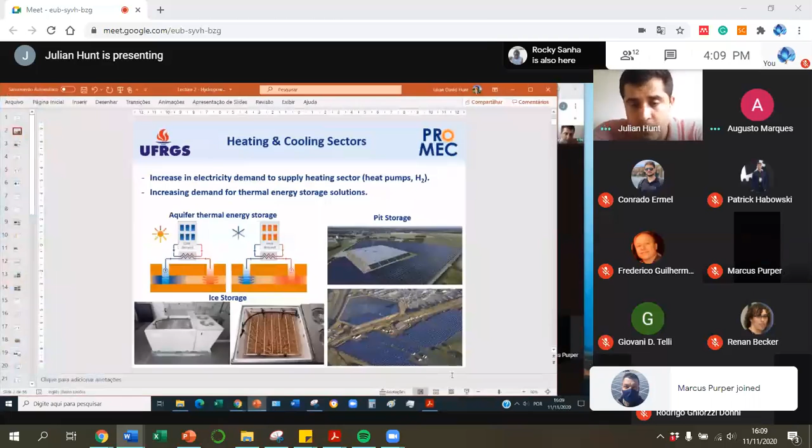There is also ice storage. Ice storage is used in Japan for a reasonable amount of time today. There are more new technologies being developed. This is one example: you have a tank and you use ice. The problem with ice is that it has a very high heat insulation capacity, so in order to freeze the whole tank with ice, you need coils, you need fine solutions, and this is one of the solutions for ice storage.

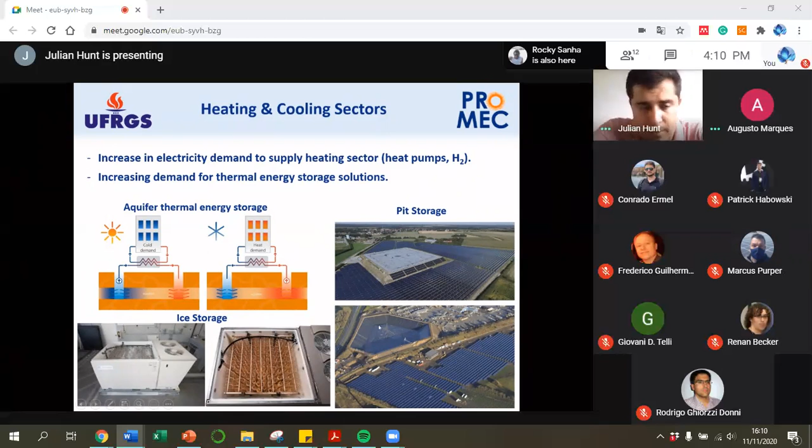Another one, which is also mature and used nowadays, particularly in Denmark, it's a very Denmark technology, is basically to dig a hole, a pit. You insulate the pit thermally so it doesn't leak water, and then you fill up this pit with water.

In the summer, when the temperature is warmer outside, they run the water through heat exchangers and heat up the water. But then in the winter, when the temperature reduces significantly, the water here is warm, and then they use it to increase the efficiency of district heating plants.

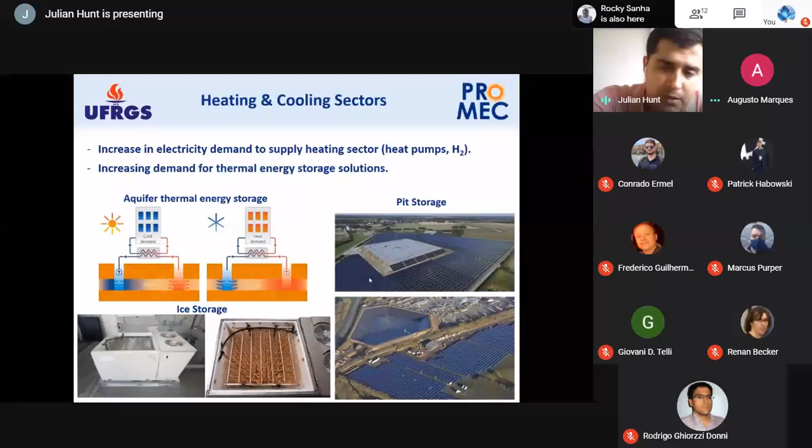These are probably not going to be a viable solution in Brazil because first, we don't have district heating. Second, the temperature variations are not so high. You need very hot summers and very cold winters in order for it to be a viable solution.

And continuing this introduction to energy storage, we have different alternatives for energy storage.

One alternative is to diversify the sources of energy. For example, when you have a very hot day and it's very sunny and not raining, you reduce the amount of hydropower during that day.

Usually when it's very hot, the wind is lower, so you generate a lot of solar power. When it's raining, when you have a month that rains a lot, you generate more hydropower. And when it's not windy, you can use other solutions.

For example, some biomass that's stored, or geothermal, or even coal, nuclear, natural gas with carbon capture storage, and nuclear power.

So the idea is to diversify as much as possible in order to reduce your reliance on energy storage.

So this is a prediction for the US, one of the predictions for US electricity generation until 2050, produced by the National Renewable Energy Laboratory.

And another aspect for estimating how much storage you need for your grid, for your energy solution, is that it will vary with the amount of intermittent variable energy sources.

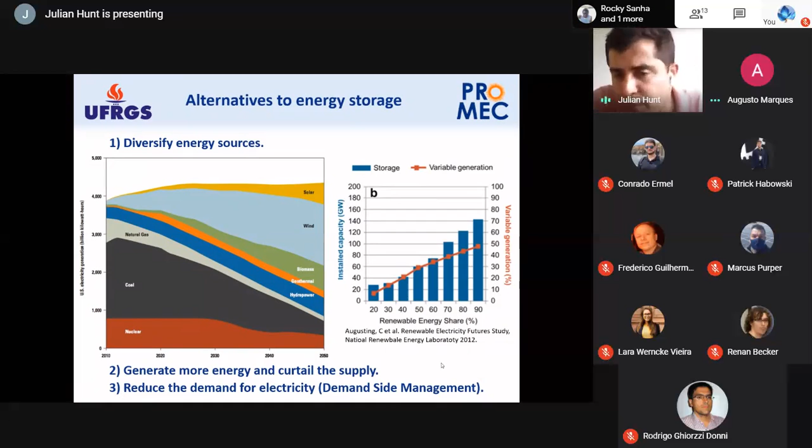And this commodity, for example electricity, has to go into a charger to charge the storage container. And then in order to take out the energy, you need a discharger.

So it's not only that you pay for the storage container. You need to transform this energy, this electricity, this commodity into another type of commodity to be able to store it and then discharge it.

The only solution where you don't have to do this is ultracapacitors, where the storage container itself is the energy storage facility. But with ultracapacitors, you still need to

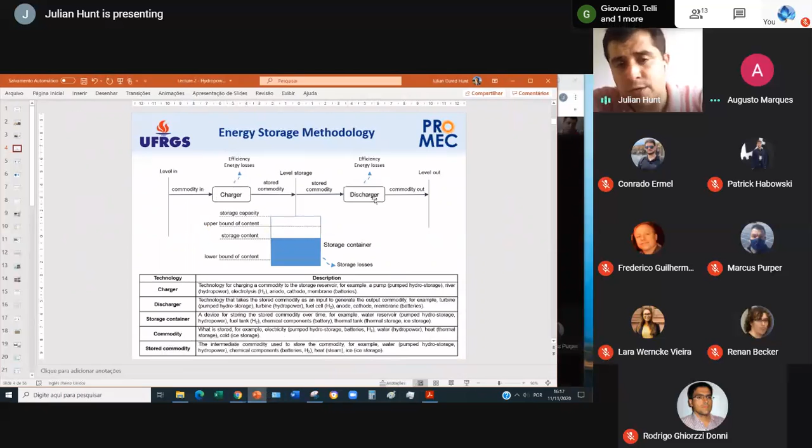Flavio. Hello, Flavio.

So this charger, the unit is in gigawatts or megawatts, is the capacity, the amount of energy that you can add to the storage in a certain time. So if you put a lot of money into this, you can increase the storage very quickly.

If you add a lot of money into the discharger, you can discharge the stored energy very quickly. And then you can invest a lot of money in the storage container, which will increase the amount of time that you can store energy, the amount of energy that you can store.

So in most cases you have to invest in the charger, the discharger, and the energy container. So it's three different aspects. Sometimes the charger is the same as the discharger, the same technology. Sometimes it's not.

Sometimes the charger and discharger come as a unit, everything together, depending on the technology. For example, in a hydropower plant, the charger is the pump, or the river feeding a hydropower reservoir. The river itself is the charger, you don't pay for it, but it's a limited resource, and you can only use it in certain locations viable for building a hydropower plant.

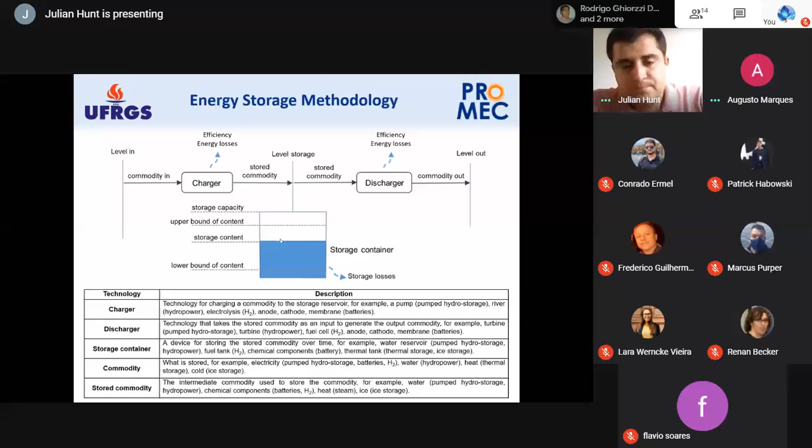And that's it for different energy storage technologies and their applications. I talked a bit about the need for storage, but this graph gives a better idea of the applications.

In terms of storage duration, seasonal storage is usually high capacity, you wouldn't build a small prototype for seasonal storage because it's expensive, so it has to be high capacity. The same applies to interseasonal storage, for a week or a month, it doesn't make sense to build a small solution for that.

As the duration decreases, the applications spread out more. For example, if storing energy for a day, you might still want higher capacity, but possibly around 1 megawatt for a battery, which relates to transmission and distribution storage.

Transmission and distribution storage means you can store energy daily in order to reduce the costs of transmission and distribution lines, as I explained in the last lecture.

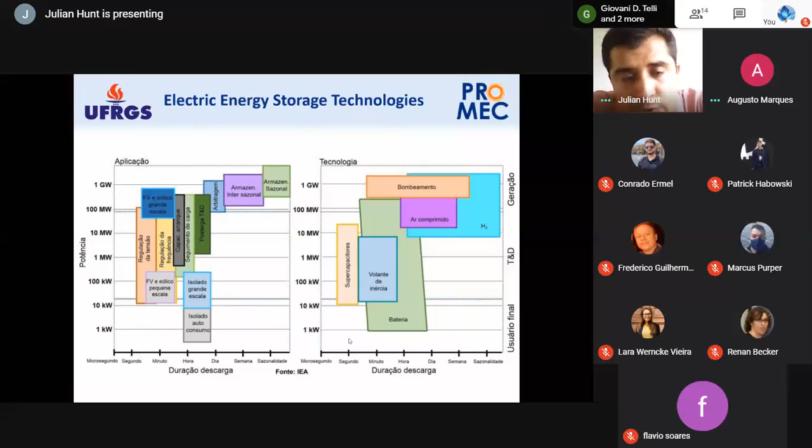And you all have supercapacitors for electricity, for seconds and milliseconds, which are usually used in computer devices, electric devices, not grid applications. Yet, maybe in the future with

Then you have 5.2% of batteries already. It is increasing very rapidly, this electrical battery energy storage.

You have very few compressed air, very few molten salt, mainly for thermal energy storage or working in combination with solar power, concentrated solar power, the one where you heat up steam to generate energy with solar power.

Charge-discharge capacity. When we talk about gigawatt hours, actually the energy that you store, hydropower pump storage goes to 98% because you have reservoirs that store energy for 3 years.

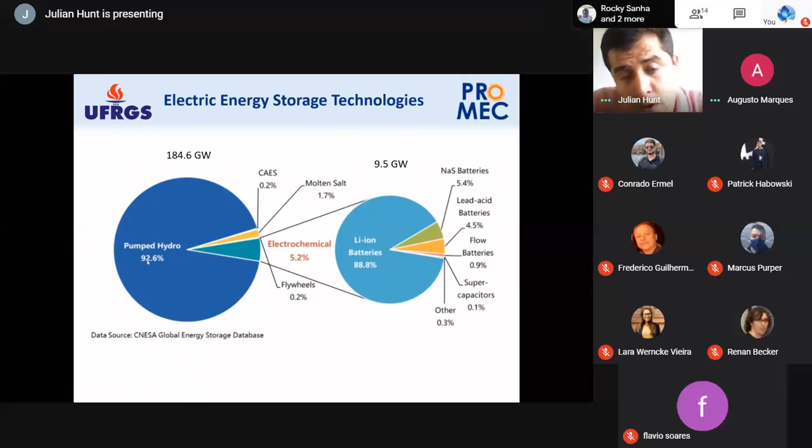It's cheap to store energy with water. But it's expensive to build the turbine, the pump, the tunnels, excavate, and have locations where this is appropriate, close to the demand. So of course, there are drawbacks and advantages in the technology.

This is a maturity graph which shows the capital requirement to develop the technology times the technology risk. And this curve works more or less like this.

I had an idea, and this idea is amazing, it's a great idea. I'm gonna make a lot of money, but have a lot of risks. But the amount of money that I have to put in is very, very small in order to, for example, get a patent for the idea. This is research and development.

So this is kind of the risk that I'm taking, that maybe one day this technology is going to be accepted and it's actually going to work and become an innovation and people will use it in the future, combined with the very small cost that you're putting into this solution.

So it's kind of like if you want to develop a technology, you look at this graph and you see, okay, which are the technologies which are very new but still need a lot of investment and have high or low risk. Then the idea is that you invest, you pursue the technology, you work with it, and it reaches

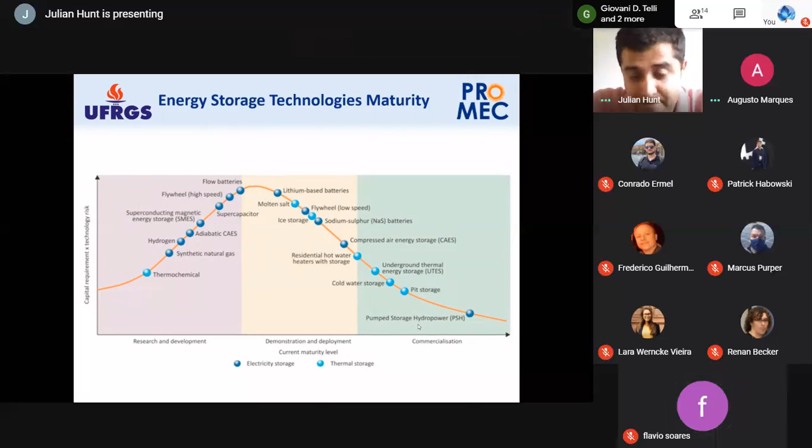Another approach to look into technology innovation, to compare different technologies and see how they compete with each other for energy storage, is this graph showing product price in dollars per kilowatt-hour capacity. This is the discharge and charge capability, not the storage itself, it's the cost to charge and discharge the storage. Here you have the cumulative installed nominal capacity, also for charging and discharging. The price here reflects the existing capacity.

You see that lithium-ion batteries are lowering in price really quickly. You have electrolysis in the past, which is also cheap. The problem with hydrogen is you have to store it, compress it, transport it, and then transform it into electricity with fuel cells. These fuel cells are also coming down in price really quickly. This data is up to 2015, so not very old.

In 2011 this compares with pump storage. Not 2011, sorry, 2020, today. If you want to build a pump storage facility, it might make more sense to build a lithium-ion battery instead. But I'm not sure, here it says 2011. This graph isn't 100% correct, I was looking for a better one but couldn't find it. Still, it's interesting to compare how these technologies vary.

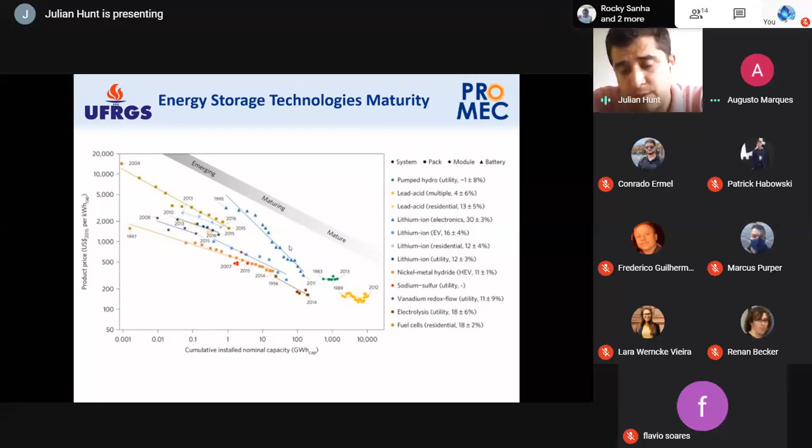Other energy storage technologies which were not mentioned in the previous graphs are mountain gravity energy storage, which is similar to a pump storage site, but using sand or gravel instead of water.

There are several other ways you can use gravity to store energy. One example is swimming pool thermal energy storage, where the idea is to turn a swimming pool into an ice tank for storing cold from the winter to use during the summer. In winter, you can use the heat as a heat sink for a heat pump, enhancing energy efficiency for heating your house. Once you produce a lot of ice, you can use it for cooling your house.

There are several alternatives like graphene ultracapacitors and graphene batteries, with a lot of research into this, and it could even be competitive with chemical batteries in the future. Also, liquid air storage—there's a company investing a lot of money into this, and some investors have put a lot of money into it, which could be a competitive technology in the future.

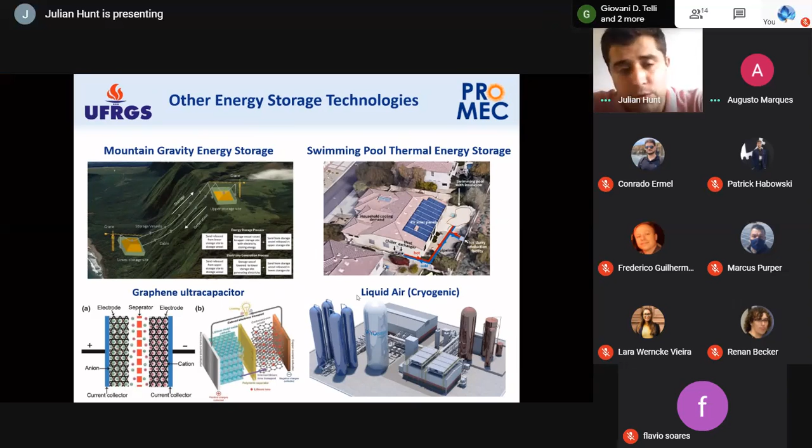I'm going to talk about these other technologies in future lectures. Am I going too quick, or is that okay? I'm not sure—well, if you have a question, please stop and ask.

So far we have a list of technologies that people prefer as subjects to be discussed in this lecture. The first one is batteries. I found it funny because we're in a mechanical engineering degree, and batteries are more of a chemical engineering subject—it's all chemistry, membranes, cathode and anode, no moving parts, but it's great. Let's do it. I'm going to spend a lot of time learning about batteries to teach you guys, because I don't have so much knowledge now, but I will.

Don't worry about it. Smart grids, yes. Thermal energy storage, transport, long-term energy planning, computer modeling, energy storage economics, applied focus, grid energy storage, hydropower, energy storage regulation, hydrogen, pump storage, off-grid energy storage, demand-side management, hourly energy prices in Brazil, biomass, biogas, fossil fuels, innovation and patents, theoretical focus, cryogenic energy storage, other mechanical energy storage, compressed air storage, and ultracapacitors.

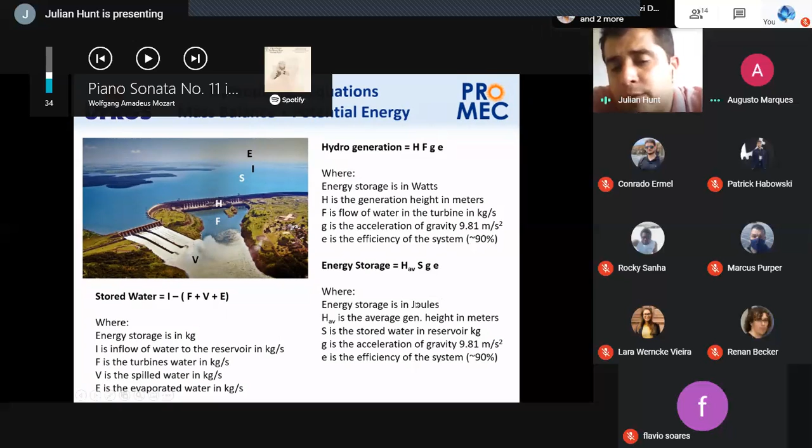Energy storage, the topic of this lecture, is literally the average head—the average difference in altitude between the upper and lower reservoir—times the amount of water stored in the reservoir, which varies. You have a section that varies in kilograms, multiplied by the acceleration of gravity and the efficiency of the system. The value is in energy, joules, not watts. But I made this presentation, and this is from here.

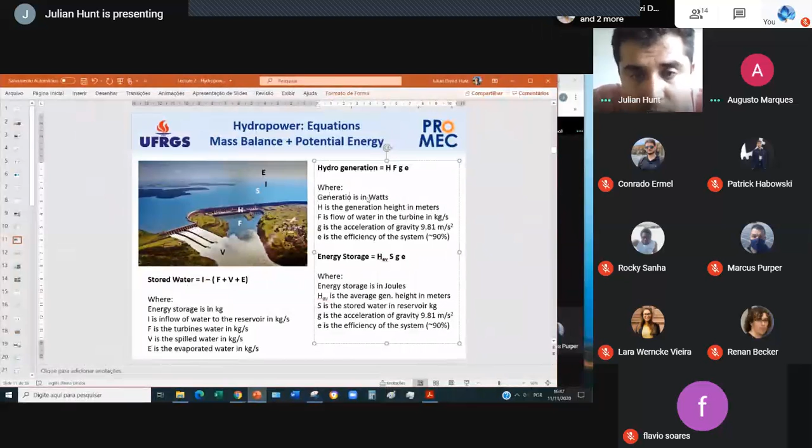The only difference is that instead of F here, which is the flow of water, it's S, which is how much water you have available to generate energy—so how much energy you have stored in your reservoir.

The next point is that this average head is used because while you're using the stored water, the head difference reduces as you consume water—the amount of water in the reservoir reduces, and the head available to generate energy also reduces. The higher the head, the more energy you generate with the same amount of flow. The lower the head, the more flow you need through the turbine to generate the same amount of energy. But for energy storage, you can use an average of this head.

Then you have the mass balance: the inflow is the amount of water that comes into the reservoir from the river flow and precipitation. So the water storage equals the amount of water that comes in, less what comes out through the turbines, the flow through the turbines, what comes out through the spillage—I put V because it's usually 'vertedor' in Portuguese, but in English it's spillage—minus the evaporation.

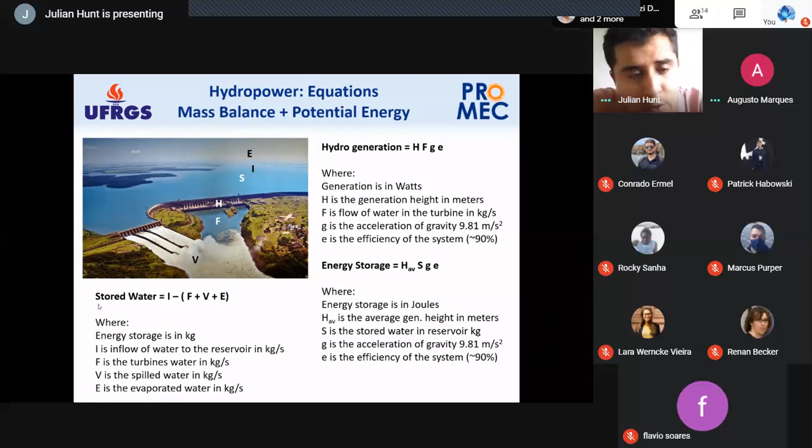So this is mainly the background, the basic theoretical background. I'm going to go through more details about other aspects, for example, the type of hydropower plants based on head.

There are power plants with low head. They're usually more expensive because you need a larger turbine that allows more flow to go through, and they generate less energy per cubic meter per second of water that flows through the turbine. They're usually not a good alternative for storage because the head is so small—if you reduce the reservoir a little bit, it has a large impact on the head, which significantly impacts the amount of energy generated.

Most of the hydropower plants in Brazil have medium head. We still have significant potential for low head, which we don't even consider because we still have potential for medium head, which is cheaper and more convenient. With medium head, the reservoir can vary something like 20, 30, 40% of the total head, and this is used for water storage, energy storage in Brazil.

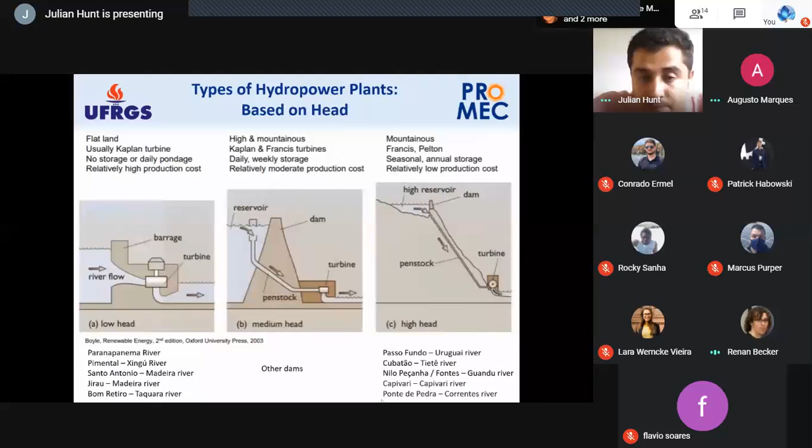In here now we have Itaipu. I don't know the term in English, but it's hydropower by fio d'água. We don't have storage in the lake. So we have Itaipu with great potential to generate energy, but it's not the excellent place to store water in that case. Is that right?

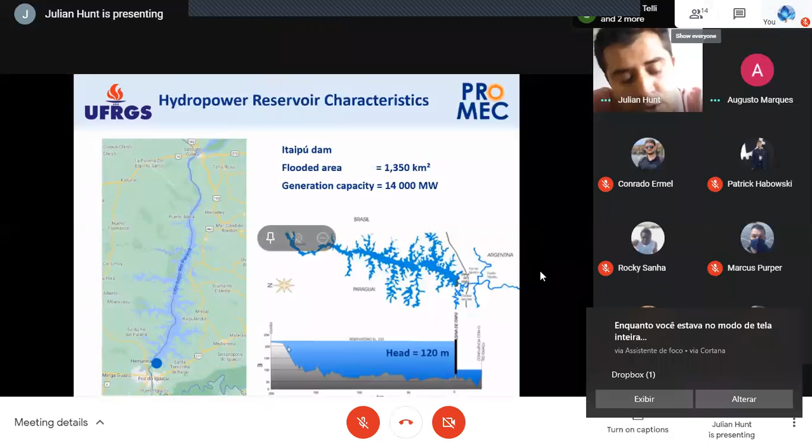Yes, exactly. I was going to mention this because it's a very awkward and difficult project to explain, and what you're saying is exactly right. They have a huge amount of water they could store here, which used to be the Seven Falls, Sete Quedas, similar to Iguaçu Falls but ten times larger, and they decided to flood all this area.

What they could have done is build the Itaipu Dam somewhere around here instead. The problem is there wouldn't be space enough to stack all the turbines, since even in the Itaipu Dam they had to split it into different sections because there are too many turbines, and the vertedouro has to fit. So they needed space, but they didn't need to flood all this. There was no need for such a huge reservoir, and they would not lose generation capacity if they built one reservoir here with ten times lower flooded area, plus a smaller reservoir here, because it would provide the same service.

It doesn't have storage capacity, but that's the run of the river generation. The reason they built Itaipu this way may be about space, but if it was about space, they could have built it in different locations with physical space available. The other reason is just that they wouldn't need to build two dams, and building two might have been a little bit more expensive.

But the thing is, back in the day, the cost to the environment had no impact. So if it was 10% cheaper, okay, flood this huge area — it makes no sense. But now that we have this reservoir, if in 50 years we need more storage capacity, we can use this as a storage reservoir. The only problem is that the dams upstream already regulate the flow, so the flow that reaches the Itaipu Dam is already kind of flat, and it can be used to generate.

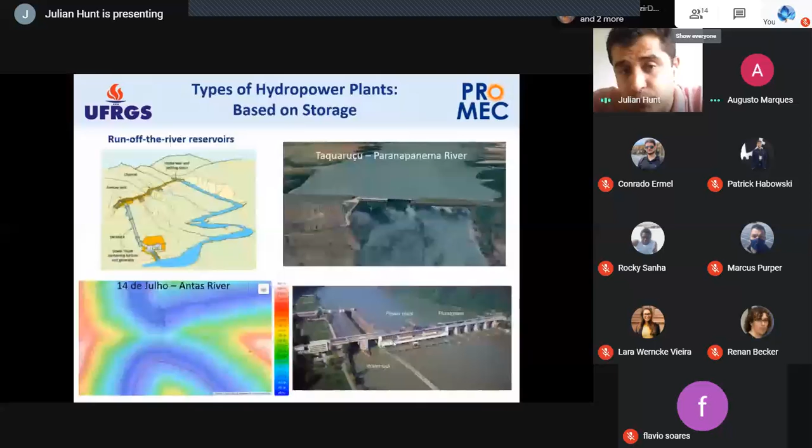Let's talk about run-of-the-river dams. In these, the reservoir level doesn't vary, it's always the same. Why is that? Because you don't want to cause impact on the environment. If you lower the reservoir, you create an exposed area between the reservoir and its surroundings, which causes environmental and social impact, and it's not a nice thing to do.

So what you can do is build a small head hydropower plant, or generate a dam at the top of the river. If you have a waterfall or drop, you construct a channel or tunnel to go forward a bit instead of flooding the cascade. You create a tunnel that reaches a certain point, you get the head there, and then generate hydropower. This is used mainly in the south of Brazil, in the Antas River.

The Antas River, in Rio Grande do Sul, is where people are more concerned about the environment. They have several of these setups where they build the dam, the river goes around, the height reduces 20, 30 meters, and then they build a tunnel, with the power station at the end. So in the south of Brazil, at different locations in Rio Grande do Sul, they use this run-of-the-river dam design. Another interesting aspect is that you can build water locks to combine hydropower generation with waterway transportation.

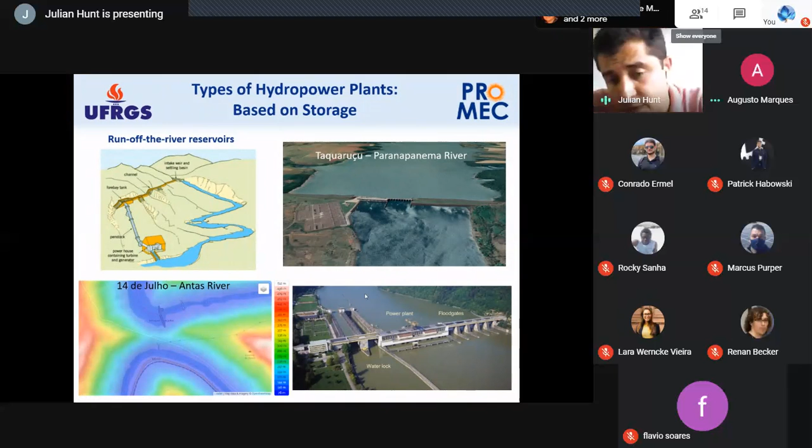It's convenient to have the reservoir level fixed because it reduces costs in dredging and maintenance of the waterway if you keep the level fixed. And it's great because waterway transportation is one of the most energy efficient, maybe the most energy efficient, inland transportation solution, depending on the project and what you want to transport.

Storage reservoirs are literally reservoirs which vary in height, designed in locations with a valley topography that allows this variation. In Austria, for example, in the winter when electricity prices are higher, they use water stored in summer when the mountain ice melts, since summer electricity prices are lower. They store energy to generate during winter. In Brazil, during the wet period when it rains a lot, the reservoir fills up in order to be used during the dry season to regulate the flow of the river. There are different types of hydropower reservoirs.

There are good hydropower reservoirs and bad hydropower reservoirs. The good ones have a valley topography with high level variation and only a small section of degraded land resulting from reservoir use. The bad reservoirs have very small level variation and result in huge areas of degraded land.

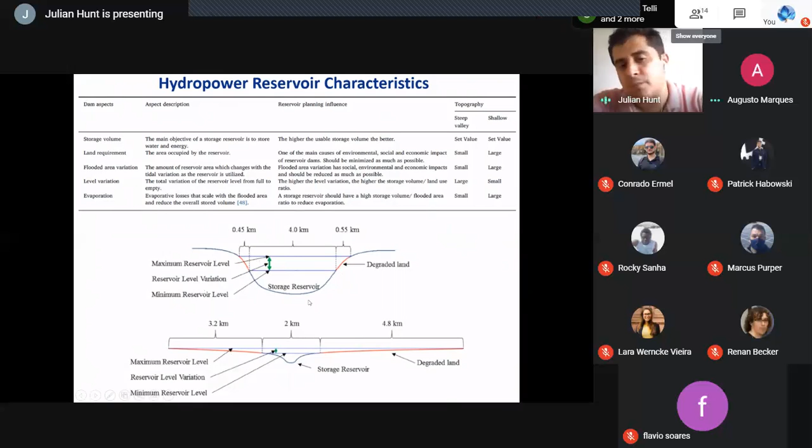So in Brazil, we have the highest reservoir, Serra da Mesa, which is this type of reservoir. But the problem is that it's up in the Tocantins River basin, and it has never been filled up because the catchment area, the area where the rain flows into the reservoir, is small. Huge reservoir, 42 gigawatts médio. This means that if it's completely filled and you generate energy, you can generate 1 gigawatt for 42 months.

Let's say 3 years. So for 3 years, you can guarantee 1 gigawatt generation, not only in the Serra da Mesa, but in the Serra da Mesa and the dams that come below it, right?

Furnas, Sobradinho, Nova Ponte, Emborcação, Três Marias, Itumbiara, Tucuruí, Serra da Mesa, Ilha Solteira, Bento Munhoz, que também é Foz do Areia, Marimbondo. These are the largest reservoirs in Brazil, talking about energy.

So the higher they are, the higher the altitude, the more dams that you have below them to generate hydropower, the higher the number. The highest energy area is Sobradinho, in the São Francisco River, right on the border of Bahia and Pernambuco.

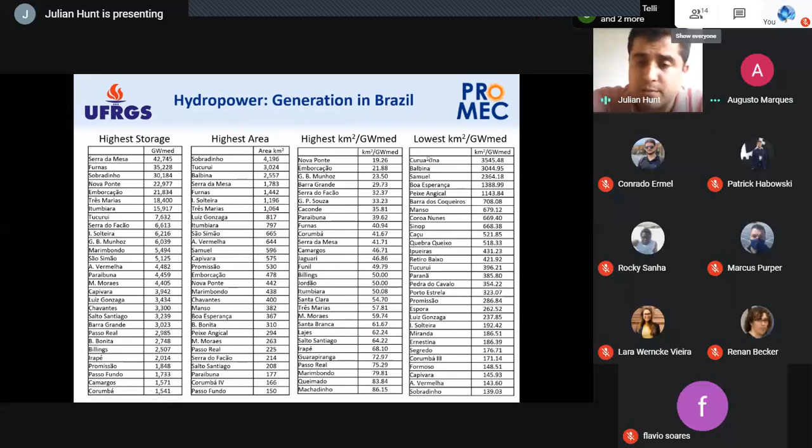So these are mostly in the Amazon region, which is very flat. That's why it doesn't make much sense to build reservoir storage in the Amazon forest. The other reason is that, for example, the Sobradinho reservoir is 10% of the size of Rio. And when it dries, 50% of the area vanishes, disappears.

This is the workable altitude, because it doesn't go all the way. The minimum altitude is never reached because it just doesn't make so much sense to lower it that far. So this is the height that usually changes, 50%.

And then what you have is that there's a city called Remanso here. When the reservoir lowers, you have to walk literally 15 kilometers to reach the reservoir, because you have a 15 kilometer area of degraded land. Remanso is here, so you're looking at Remanso, and this point here is this mountain.

So it's something like 70 kilometers distance, a long way, a huge area where it's not used. In this area is Cerrado, so there's not so much going on, but if you do this in the Amazon region, you have in the middle of the forest a new reservoir, which they didn't even bother to remove the trees from. They just flooded the reservoir. It's completely absurd what they did.

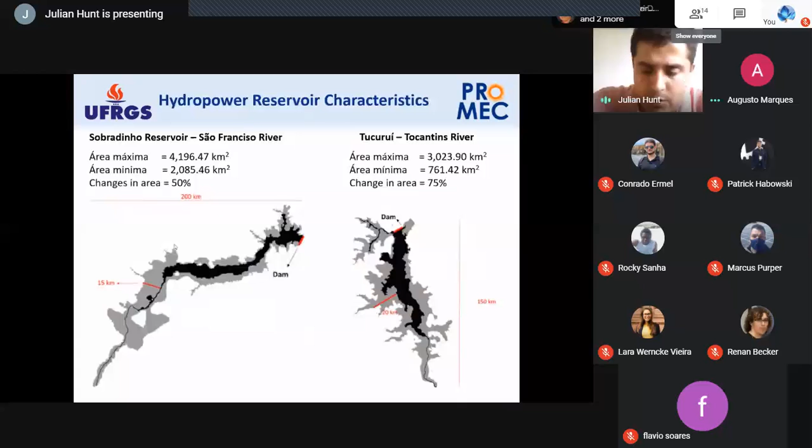So these are bad reservoirs. Bad reservoirs should not be built, and maybe they should be decommissioned, while good reservoirs should be built. So there's this issue with reservoirs, which lately there's a lot of discussion about. And yes, we have to agree, it's not good for Brazil, it's not good for the economy, even though it stores energy, but there are several other alternatives you can use. In the next lectures, I'm going to talk about some alternatives for these type of reservoirs. So I already talked about Itaipu, the Itaipu concept.

Now let's talk about why we need to store energy, why it's so important to have these large reservoirs. The main reason is that in the southeast, the amount of water available for hydropower generation varies significantly. In the wet period, when there's more rain, January, February, March, there's a lot of water, and then in the dry period there's not so much water. The idea is to store this water and use it during the dry period so that you have a constant flow to run the turbine as optimally as possible, to generate electricity during peak hours, to have water to use the hydropower plants as best as possible, and to lower the cost of energy.

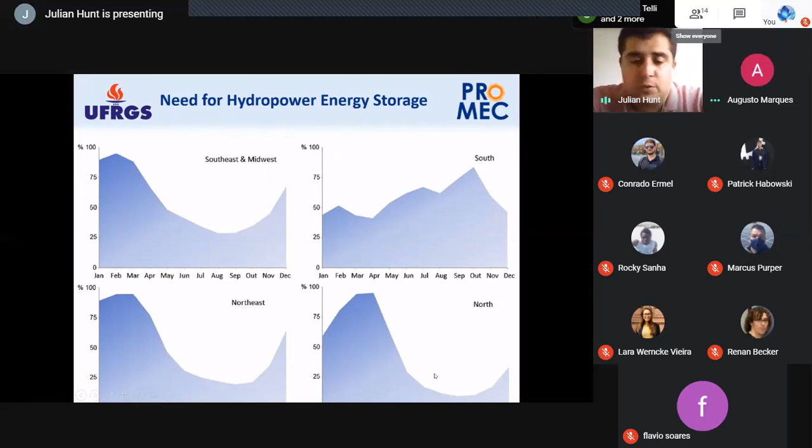The same happens in the northeast, the same happens in the north region. In the north region, the difference between the wet period and the dry period is even higher. And in the north, you really should build hydropower storage reservoirs.

So how do the storage reservoirs combine with run-of-the-river plants? You would usually build these storage reservoirs on the top of your basin to regulate the flow for the rest of the hydropower plants in your river.

For example, this is the Iguaçu River. The rain that happens in this part of the basin will flow into the Foz do Areia dam, which is the biggest dam in the south of Brazil. You store all the rain that happens mainly during September, October, November, which are the wettest months in the basin, and then you regulate the flow and guarantee that you always have water to generate energy.

The other thing is that when it rains a lot, if you didn't have storage, all the water would just flow through the dams without generating electricity. That's why it's important to have storage reservoirs on the head of the river, and it's important to have run-of-the-river dams below in order to maintain the head. As I said, the higher the head, the more electricity generation you have per cubic meter per second of water. So this is kind of the representation of a hydropower basin. Here is the Cataratas do Iguaçu.

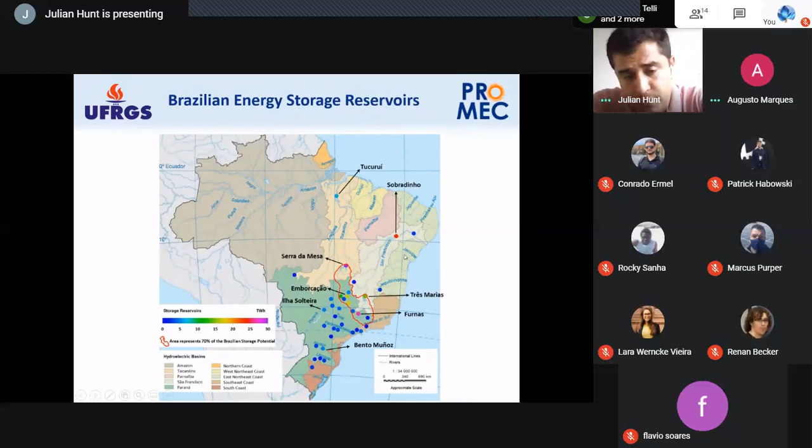Be very careful with the storage reservoirs in the south, which is not the case. It's not happening. ONS is not really helping the south to supply its energy requirements. I'm not sure why, but they are doing a very bad job guaranteeing the supply of energy in the south.

Hydropower vulnerability is one of the issues of Brazil. We had several crises due to lack of rain, due to droughts. We had one in 1924, drought in São Paulo, which caused a crisis. Then 1938, 50, 63, 67, 83, 87, 95, 2001, 2014, and we're still in crisis today.

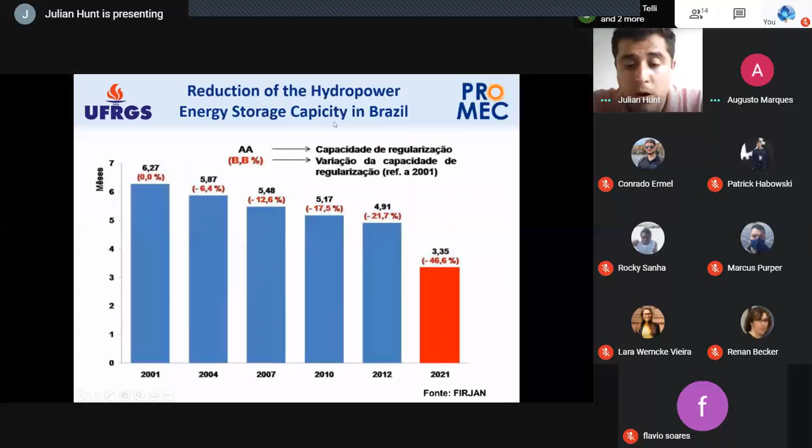And another aspect which reservoirs have, as I mentioned before, when the reservoirs are low, the amount of head that you have to generate the same amount of electricity reduces. So for example, for Bento Muñoz, the highest head is 135, the minimum head is 93. Now we are operating at 3% capacity at Bento Muñoz, Foz do Areia today, so the head is something around 94, 95 meters.

So we would need something like 30% more water - we waste a lot of water to generate the same amount of energy if the reservoir was full. So we're in a situation that is not good, right? We need to waste more water to generate the same amount of energy.

So this is the comparison between full reservoirs and low reservoirs, and it's good to have this storage capacity in order to, if it rains, not waste the water. But of course, there is a balance between being full and having a higher head, which requires less water to generate the same amount of energy.

If you compare when you have the reservoirs at a lower altitude - this is for São Francisco. This is when the reservoirs are full. Nowadays it's raining; last year and this year it's raining a lot in São Francisco, so the reservoirs are relatively high.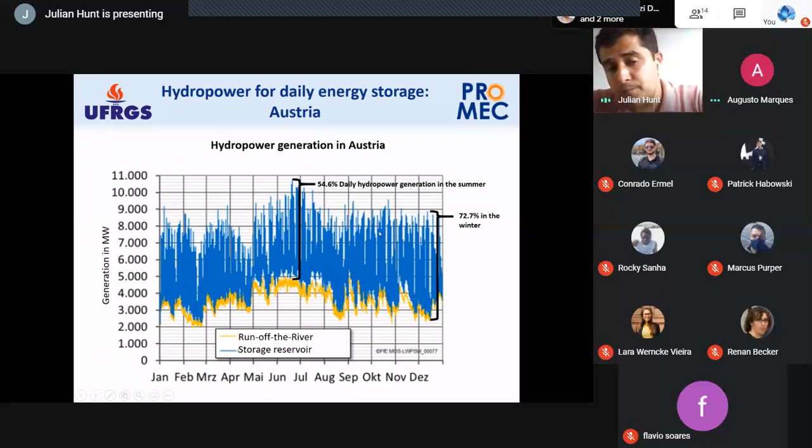So Brazil does a similar thing. For example, in the southeast, you have total variations with run-of-the-river and storage reservoirs: a variation of 54.6% in the summer, where the demand is higher, and 72.7% in the winter. The summer is a little smaller because you have run-of-the-river dams in the north now, which generate at full capacity because they don't have storage, and the flow of the river reaches maximum and they start spilling.

That's why the variability in the summer is lower. In the winter, the dams in the north reduce. So this is very important for Brazil. Brazil should start focusing on using this hydropower potential for peak generation instead of base loads. I'm not sure why they haven't really gone in this direction. This would be very convenient for Brazil.

This is the south of Brazil. The south of Brazil uses even more than the southeast, because it's not really a base load type. It is base load, but it shouldn't be base load. It should only be used for peak generation in the south, in order to save water.

For this not to happen... but what happened in the beginning of the year is that there was no more water. All the water was gone, all the reservoirs were empty. So you have 14 gigawatts, similar to the capacity of Itaipu, which you could have for generation, peak generation, which is very expensive. If you wanted to do this with a thermal power plant, it would cost something like 500 to 600 reals per megawatt hour for a peak generation plant.

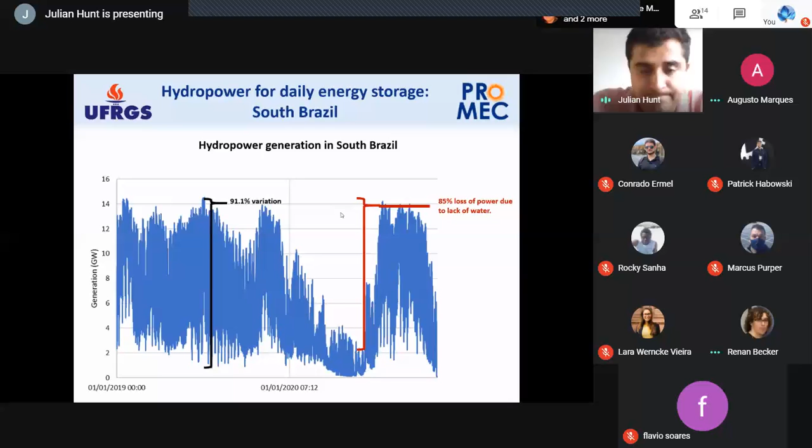Thanks for sharing that. Following the same rationale, in the end of 2014 we had the reservoir of Paraibuna, which is in São Paulo but supplies water to Rio de Janeiro. It was used for hydropower generation, but it reached the point that we didn't have water to drink because we wasted water for hydropower generation.

It's incredible, right? If somebody with a little common sense was planning and operating these dams, they would always try to maintain the level of the reservoir. This is a pluriannual reservoir, right? Over 3 years you see the level come down, particularly if you have 3 or 4 years of drought, you still have water to supply, right?

Not electricity. And then that's why you reached a point where you had no more water, and Rio de Janeiro had to ration water. There were a lot of counties, municipalities, which had a water shortage, and the water quality reduced because you didn't have enough water to dilute the sewage that people throw into the rivers. So there was a huge crisis there.

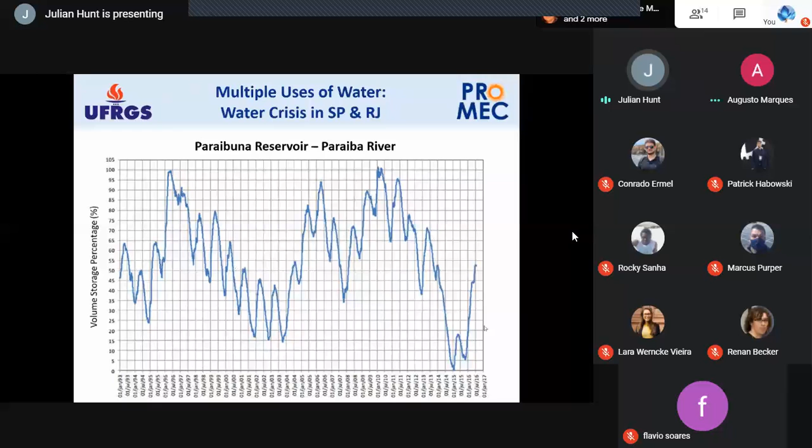Thank God it doesn't happen again. The level today is something like 23%. I really like hydropower, so I follow almost every day the level of the dams in Brazil, it's one of my hobbies.

Anyway, another topic which I mentioned and people were interested in is PLD. PLD is the name of the cost of electricity in Brazil, and the impact of hydropower is around 60%. 15% is the demand. For example, if it's a very hot day and everyone's turning on the air conditioning, maybe next week the price will go up because of that, they change the demand and it impacts the PLD.

You have the storage reservoirs having an impact of around 15% also. So if the storage reservoirs are very full or very empty, it only impacts 15%, which in my opinion shouldn't be this way. It should be the opposite, the reservoirs should impact not 15, but at least 40%.

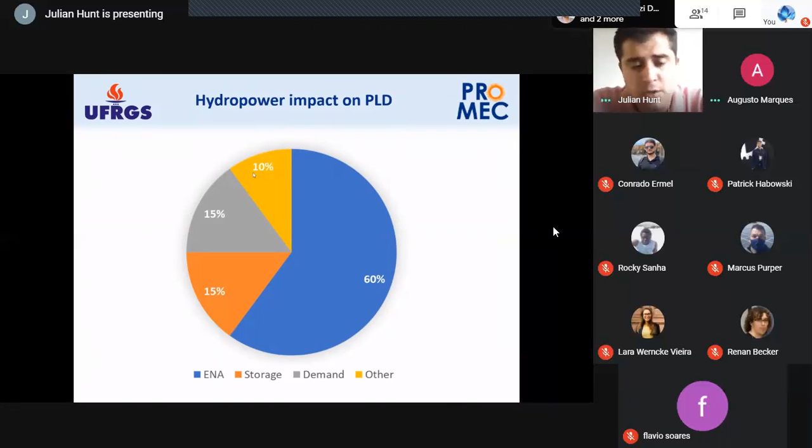That's one of the reasons why the energy sector is so vulnerable, because they don't take storage seriously, but it is very important. And the other aspects nowadays are wind power, hydropower plants which are not delivered in time, transmission lines which are not delivered in time, so kind of management issues, and wind power.

Now I have this cause versus consequence curve, and I would like to ask you, which curve is impacting the other? Is the blue line impacting the orange line, or is the orange line impacting the blue line? If you analyze and check, what would you say? Cause and consequence, anyone? Show me the R squared.

Yeah, that's... If you could teach me how to do that, that would be great. I don't know this methodology. But looking at it, what do you say?

For example, this line is low, then it reduces, then it increases, and this line follows it, right? Then the blue line reduces, and the orange one starts to reduce also, and then the blue line increases, and the orange line stops reducing. Or is that the opposite way around?

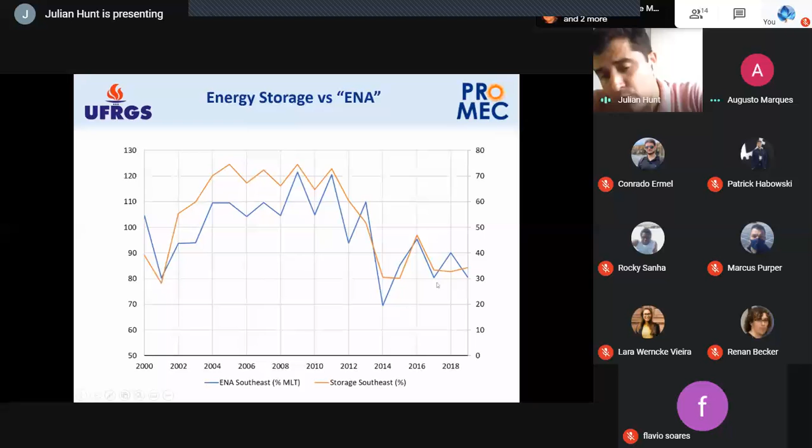But my paper that I'm going to talk about now, which is the last thing, argues that the storage reservoirs, the level of storage reservoir in Brazil, impact how much rain is going to happen in Brazil. If the storage reservoirs are low, it will rain not much. The rain pattern in Brazil will lower because of the impacts of the reservoirs on the climate. I'm going to give a little bit more detail on that.

So Natalia is part of this research. The argument is that the reservoirs in Brazil are so large that they have substantial impact on the weather. São Paulo, for example, 3.5% of the area of São Paulo are reservoirs, 1.6% of Paraná, 1.5% of Minas, and 1.7% of Goiás. The reservoirs in Brazil have a huge variation in area and variation in head.

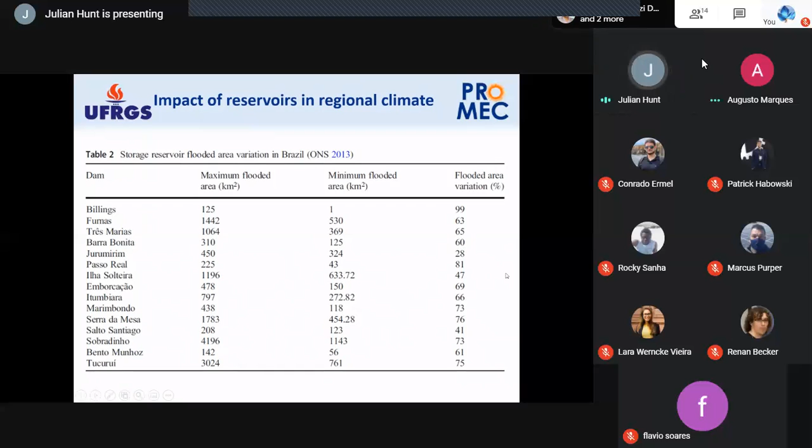For example, the Billings reservoir has 99% variation, it can go completely empty. Furnas is 63% of the area that varies - that's not the head, that's the flooded area, between when it's full and when it's empty. It's 64-65% for Três Marias. Barra Bonita and Jurumirim have a small variation. Passo Real in Rio Grande do Sul is 81%, also huge variation. So generally, the area varies a lot.

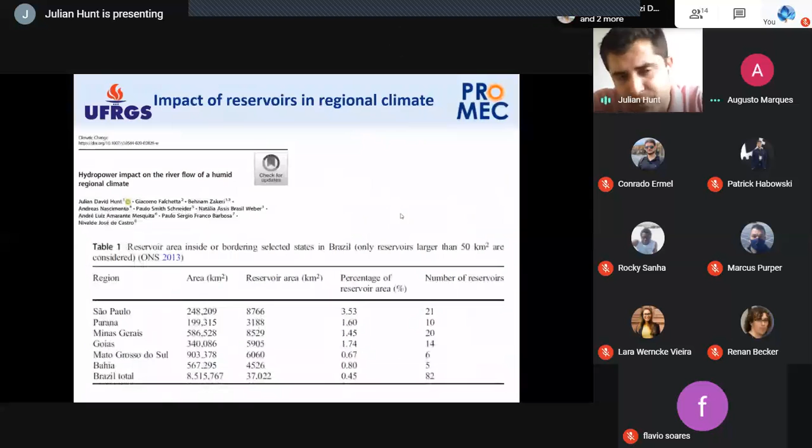And the proposal, the justification, the argument I'm trying to make, that I made in this paper - it was accepted by Climatic Change, which has an impact factor of 5, so it's a respected journal - is that when the reservoirs are full, what happens is that the basin gets encharcada, it gets wet.

So the whole basin above, a montante of the reservoir, it gets wet also. So the soil gets wet, and when it's wet, it evaporates more water, which reduces the temperature of the region and increases the relative humidity of the region. If you have a warm or cold front reaching this region, the chances of raining increase.

On the other hand, when the reservoirs are low, there is less humidity on the ground, there's less evaporation on the basin. Having less evaporation on the basin, the temperature is higher, the relative humidity is lower. When you have a warm, humid front coming from the Amazon or a cold front coming from the south, it just passes. It doesn't rain.

This is the phenomenon of the flying rivers. The warm and humid front is the flying rivers, but the flying rivers just go straight to the Atlantic Ocean. It rains in the Atlantic Ocean because it's too hot, too dry in Brazil to rain.

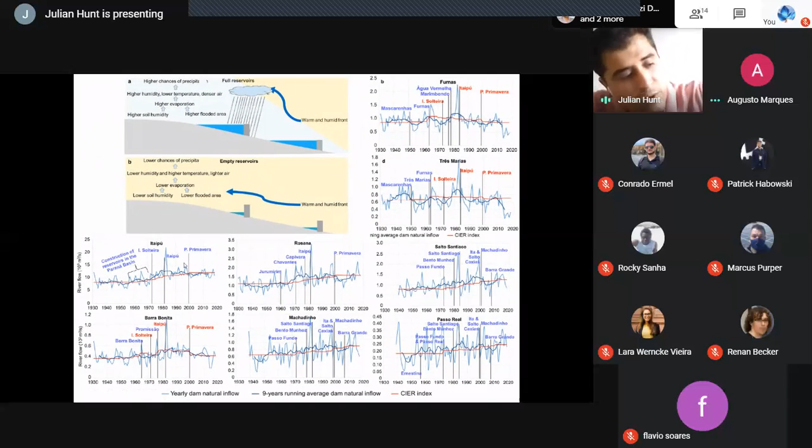Yeah, I could talk about this a lot longer, but we'd like to hear your thoughts on this.

Before I conclude the paper, we talked about the diversification of energy sources and how that could be an alternative for energy storage. We talked about the methodology for energy storage, which can be applied to different technologies. We talked about technologies for energy storage. We showed the preference for each student on energy storage. We introduced hydropower, talked about details on hydropower in Brazil, the benefits of hydropower for peak generation and for daily storage, and also the impact of hydropower reservoirs on the climate.

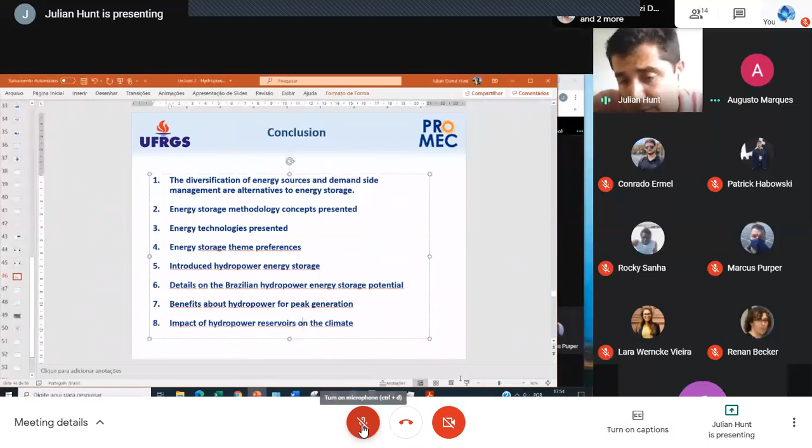I had to talk really quickly because there was a lot of content. I don't want to go through more than one lecture about hydropower. There was a lot to talk about hydropower in Brazil. So many things to process. A lot, yeah.

Julian, can you hear me? Yeah. Julian, congratulations, a very nice paper. Congratulations to you and Natalia.

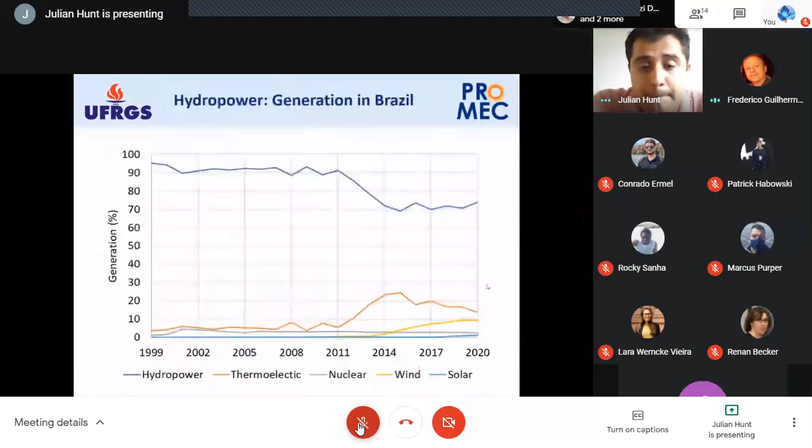I have one question about Dilma in 2012. I didn't understand what she expected to do, actually. She wanted to reduce the cost by decreasing the reservoirs in order to, what she expected to happen, actually.

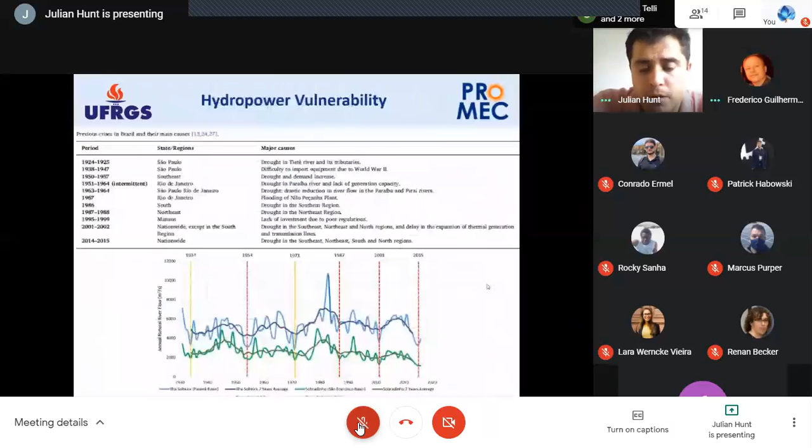Yeah, so what happened is it's the MP 579, something like that, which had the intent of reducing the cost of electricity and lowering the... I don't know exactly what was the regulation details. Probably Flavio would know much better than I.

Let me explain exactly what the law was. The law required companies to join a proposal involving a certain fixed amount of money they would receive, and the government would then operate the electricity sector based on this fixed amount, which was not very good for energy companies because they couldn't, for example, play with PLD and its changes.

Only Eletrobras joined, but Eletrobras represents about 30% of Brazil's electricity generation, maybe even 40% back in the day. The intention was to reduce speculation and reduce the cost of electricity. But ONS decided not to dispatch thermoelectric power plants in order to avoid paying the amount of money they were promising under this regulation. It's incredible.

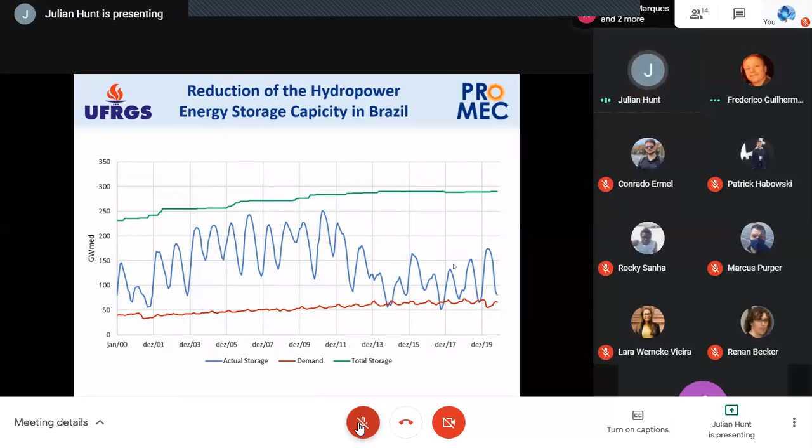She had good intentions, let's give her that—she wasn't expecting it would turn out this way. The energy crisis had a huge impact on her popularity, and it was just a stupid idea in hindsight. But no one published this; no one showed the impact reservoirs had on the amount of rain, so she didn't know this.

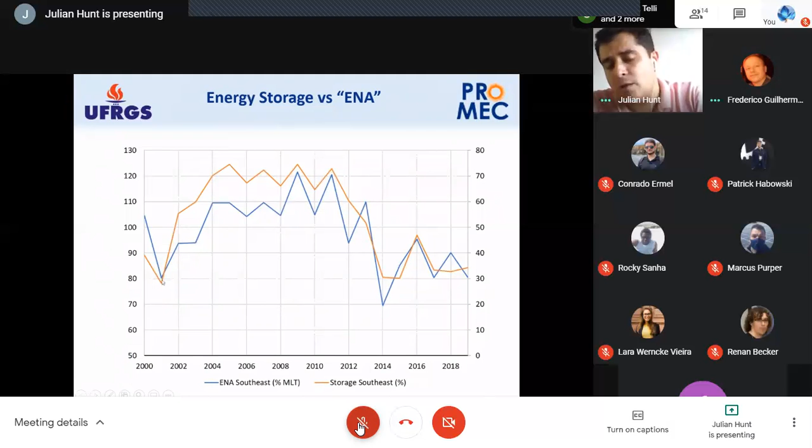I'm quite sure the people managing the energy sector in 2001, when reservoir levels got very low, were very used to this dynamic—full reservoirs, more rain, impacts on climate—because they lived through the construction of the dams and saw those impacts. They knew that if they didn't do energy rationing, the reservoirs would never fill up again, because the rain wasn't going to come and refill them.

They were very happy because within 2-3 years the reservoirs went back to normal. Maybe what happened is people forgot—new managers arrived, and the ones who understood how the energy sector really operated eventually died or moved on. That's all speculation, of course.

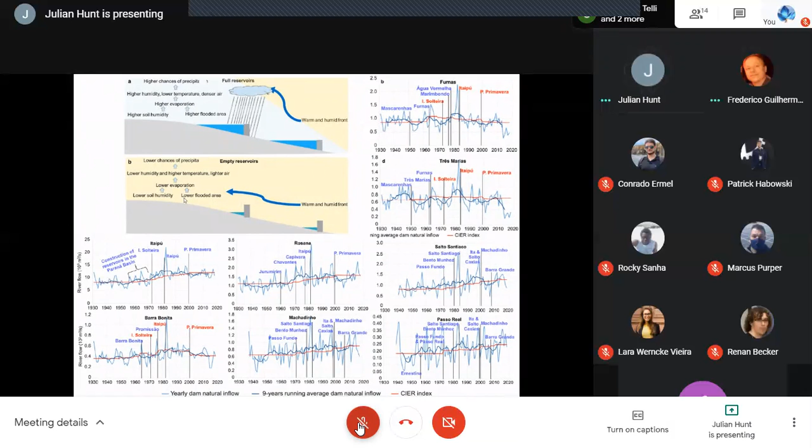All right, thank you. I get really excited about hydropower. Anyway, any other questions? That's good for us—we have a lot to learn from you.

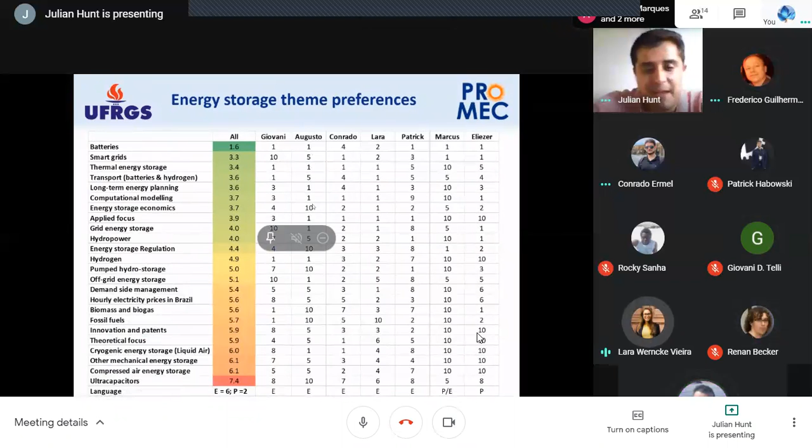Thank you, yeah, thank you. Thank you, Julian, bye. Thank you, Julian, have a nice week. Bye bye, bye. Thank you, Julian. Bye bye, bye, Julian.